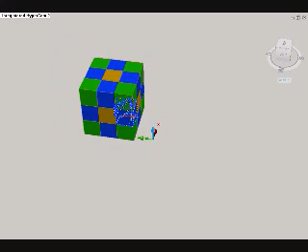Okay, we can make a 3 by 3. It's not hard. First, what we're going to do, we can make a box from anywhere. Cube. Turn my polar back on here.

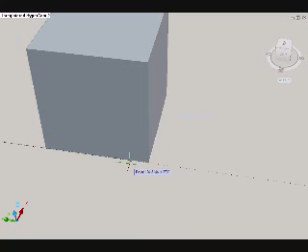180, length of 30. Not hard. Make lines from the corner, spanning in each direction by 10. Oop, that was 10. And then make sure it says Z plus, 10. Easy. Slice here. 3 points. Here. Make sure there's one on the Z.

And then just anywhere else on polar. You just slice this piece here from the midpoint. Make sure you have that in the object snap. Ooh, crud. Let's try that again.

Slice here, 3 points here. Vertical, by 180. Slice all of them. 3 points from here. Z plus.

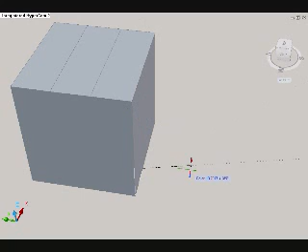270. Slice the last 3 over here. Midpoint. Remember to hit 3 points every time. Z plus. 270. Slice all 6 of these.

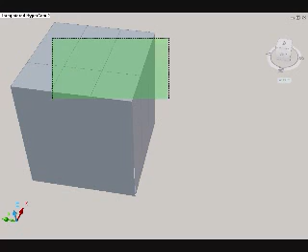Or sorry, 8 of these. From here. Anywhere that's on polar. Got to hit 3 points. Slice all 8. 3 points. This endpoint. Polar. Polar. Space. That gives us all our bottom cubies.

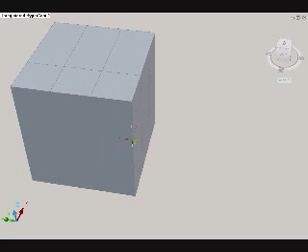Slice our top 8. Make sure not to highlight all of them this time, because that'll just hit the bottom ones too. 3 points from the midpoint. Make sure you get the right one. Here. Now, that'll make all of our cubies.

What you want to do here, you want to take this one. Why did it do that? Delete it. Take the one behind it. Move it from its corner to this corner.

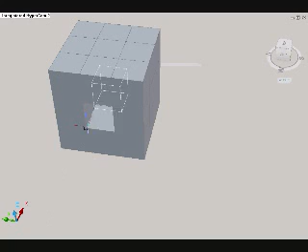Easy as that. Now, what we're going to want to do here, we're going to want to copy these 3. Oh, wait, dang it. Copy this 2 by 2 section here.

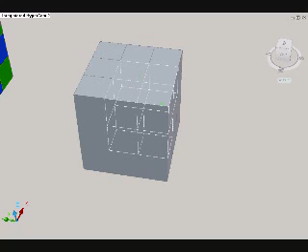Last piece. Here. Darn it. Why does it keep doing that? Orbit. Got a little look in here.

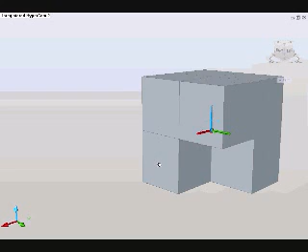Make a line from this intersection here to this endpoint right here to get our center. Make a sphere from the midpoint of this line so it's directly in the center. Radius of 12. Comes out like this.

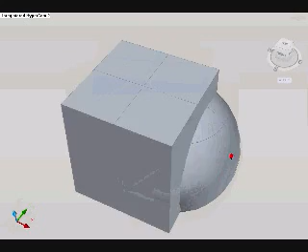Now you're going to want to take this, orbit around it, to where you're literally just left with one corner, one edge, and one center, and the center sphere. Now comes the fun part.

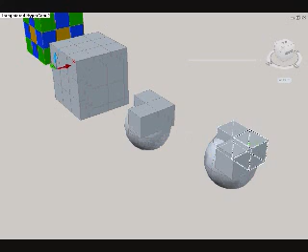Copy this from here to here. So now we got 2. Now first what we do, subtract from these 3, space, and then our sphere, space.

That's going to cause this to have all the cuts we need. However, we're going to need to slice it up again. So slice here, 3 points here, straight across, 270, z-axis.

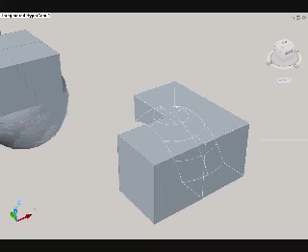Slice here, space here, 0. 3 points. Slice here, space, 3 points. Our intersection here, 0 degrees, z-axis.

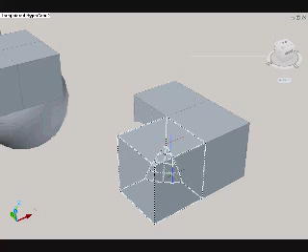Now, here we're left with this. We have our center piece mainly done. Corner is going to need an attachment on it. However, we're basically going to scrap this entire thing.

Make sure you get rid of that too. So now we have our edge piece, which needs our little center hookup, and our corner. Okay, so what we're going to do over here, see if we can zoom in on this one a little bit.

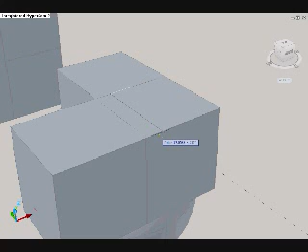There we are. Make a line from the top over here, and out this way, 180 by 3. Come down this way, 270, 10, z-axis 10, come over here by 6.

Delete this, make a box from this endpoint that we just made all the way up to this corner point. That should do it there. Now center, we already got our center. Now here comes the fun part.

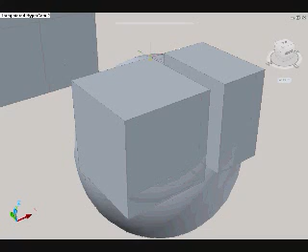We're going to want to go mirror 3D off of this object here, 3 points, go off here, here, and here. We're basically choosing the point that it's going to mirror. Just going to do it again. Mirror 3D, this one, 3 points, bottom, edge, or corner, whatever, this corner, space.

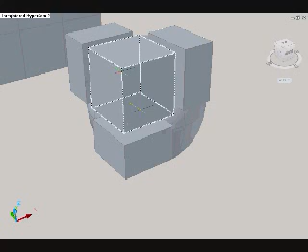It's going to make that for us. Now, we're going to use all this to make our corner pieces and the rest of our edge pieces. So we're going to orbit around here a little bit. Now, first thing we're going to do, we're going to go slice on the sphere.

3 points. On this one, use the 3 most points you can see. Delete that, and delete this. Orbit again.

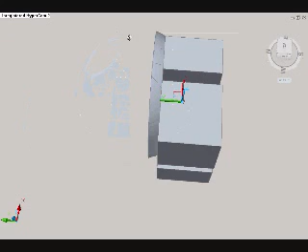Slice what's left of our sphere. 3 points. Corner, corner, corner. Delete that, delete this. And of course, get rid of our baselines we made to make that piece.

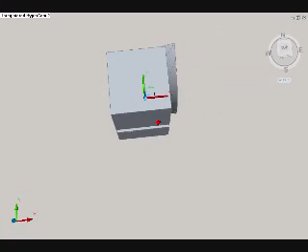Now here, the only pieces we need. First what we're going to do is we're going to slice our sphere by 3 points. Corner, corner, corner. That's going to give us that.

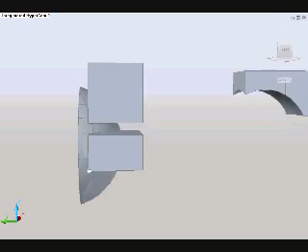So what we're going to do now is type union to combine these two objects. Now here's our corner piece. Now, we also want to slice what's left of our sphere here by 3 points, by the corners. Get rid of this. Now, union again on these two. That's going to make our little divot in our edge piece.

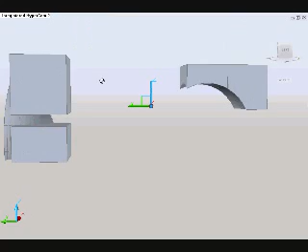So, give here, let's orbit around here. Let's move this by the corner. If it would line itself up onto this corner.

Now we're going to rotate 3D here. So our axis is 270. And if I'm not mistaken, it's 270. Yes.

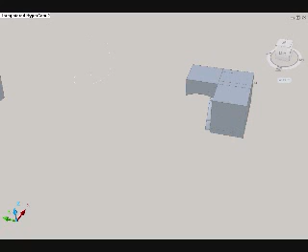Take this, we're going to move it by this midpoint and put it on our edge piece midpoint. We can type union. I'll highlight what's on our edge piece. It'll put both parts. Hit space.

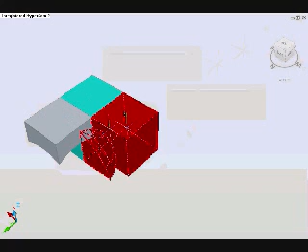Now that will make it to where we literally have 2 of the 3 pieces done. Go ahead and take this, change that to red, edge piece, change that to cyan, and now here comes the fun part.

Copy here, over here, just base points in case we mess up. Make a line here, make a cylinder from anywhere, radius of 2.25, height of -10, that way it goes down.

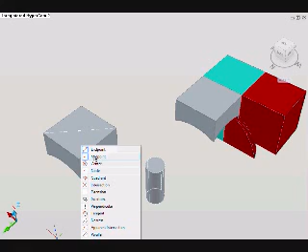Take this, we're going to want to move it. Make sure under Object Snap your center's turned on. From the center here, to the midpoint on this, I'm going to make a union.

Come on. There we go. So now I have this entire thing. Remember, we're not done with this yet, because we're still going to make the center cap.

Zoom in on this a little bit. There we go.